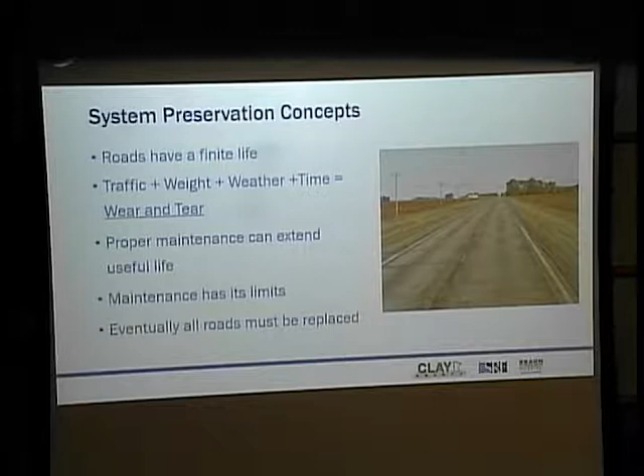Priorities of pavement preservation are really focused on preventing fair condition roadways from falling into the poor condition category, because that's when maintenance activities tend to be a lot more costly. Whereas if you've got a roadway in fair or good condition, you can do a seal coat, a crack seal, or a mill and overlay, which is a lower cost solution, rather than a pavement in poor condition where you're going to have to reconstruct it, which can be a lot more costly.

It's really important to know that, because a lot of times you'll see people doing work on roadways that may look good and are still in fairly good shape, but you're really just trying to extend the life of that roadway at a much lower unit cost, rather than always fixing the poor condition pavements, which is always going to be a more costly solution.

So you want to prioritize preservation strategies like mill and overlays and seal coats over the more expensive reconstructs, and really try to dial in the appropriate life cycle time frame for each of the roadways. Again, there are different traffic conditions and weather and soil conditions on each roadway, so each roadway, depending on where it is, has a unique life cycle.

As part of this pavement management software that the county uses, you're able to dial in for each roadway segment in the county what the appropriate life cycle is for it, and how to use the preservation strategies most effectively for that roadway.

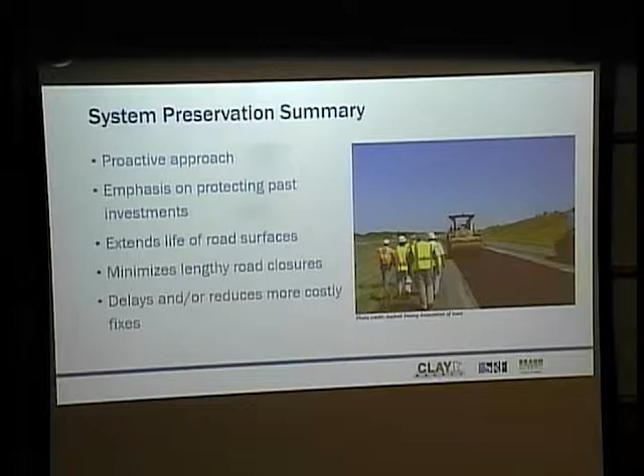Getting into some of the existing tools the county currently uses: they use ICON pavement management software, which takes into account a number of factors. MnDOT collects pavement quality data on a cycle, and that data is imported into the software along with construction project history. It uses GIS and tracks all the roadway segments in the county, so that data can be used to project future scenarios and assess the current state of the system.

The county also really understands the preservation activities and why they're necessary to maintain the system, including the importance of chip sealing and mill and overlay as part of preservation activities rather than just focusing on reconstructions.

So does the state test the roads, or do we test them? The County Engineers Association has a contract with MnDOT to do that for the county, so the state does that for all counties - all 87 counties get data. It used to be every 4 years, now it's going to be every 2 years. We realize this data is very important but it's costly, and as an association, counties have banded together to increase that data collection to every 2 years now.

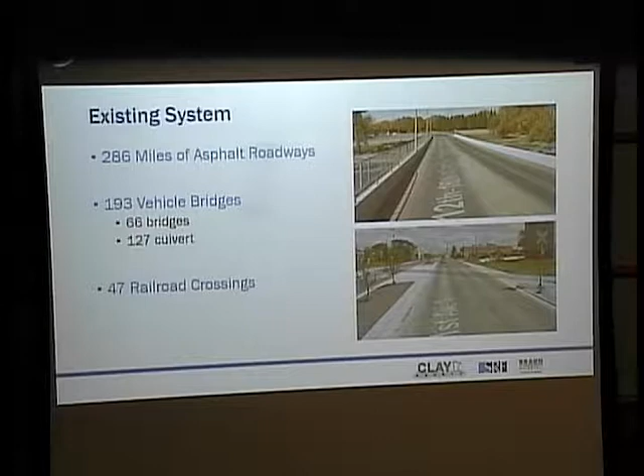Going through some of the existing system characteristics the county has: about 286 miles of asphalt roadway and 193 vehicle bridges, which can either be a culvert or a bridge, on the county system, plus about 47 railroad crossings. All of these assets come out of the county's budget every year to maintain. The ICON software I mentioned is just about pavement management - these other systems we look at as a whole, allocating budget for each item for maintenance, with pavement being its own category.

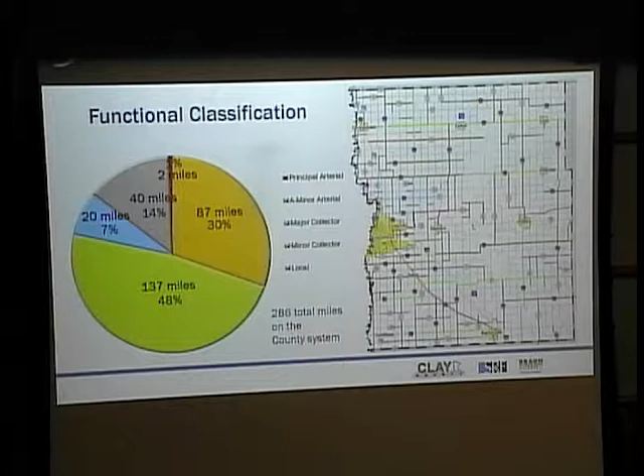As mentioned, there are 286 miles of roadways on the county system. The county's roadways are broken down by functional class. This map and pie chart highlight the breakdown of functional class, from principal arterial down to major and minor collector and local roadway. It's really important to establish a functional class system for your roadways.

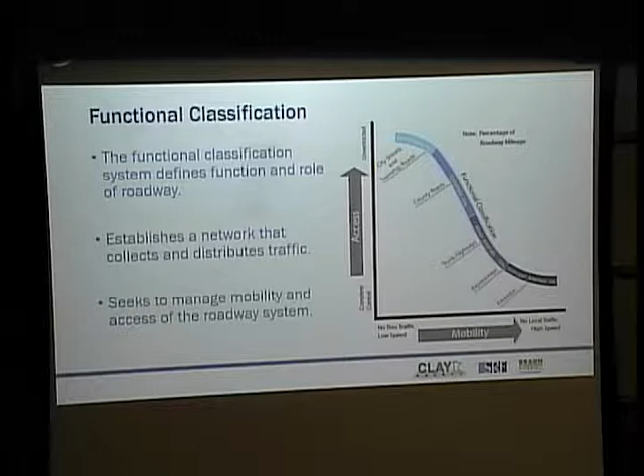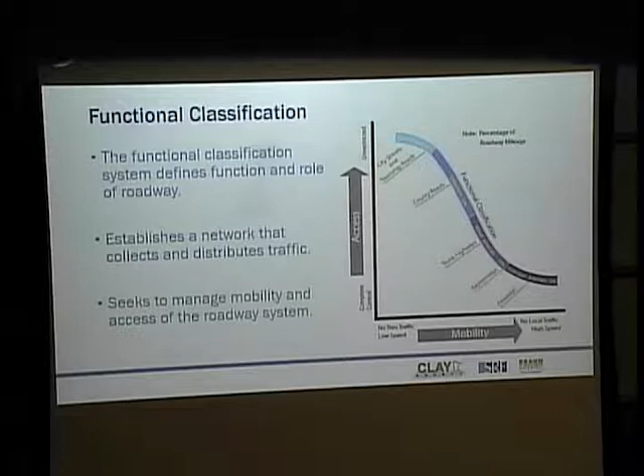It helps define the function and role of the roadway so you can establish a good network that collects and distributes traffic appropriately. The graphic on the right shows that the higher the access on a roadway, typically the lower the mobility. So city local roads tend to have a lot of access points, meaning it's a bit slower to move through them, versus a principal arterial like a freeway or expressway, which is meant for high mobility and moving traffic efficiently and quickly, so there tend to be a lot less access points on it.

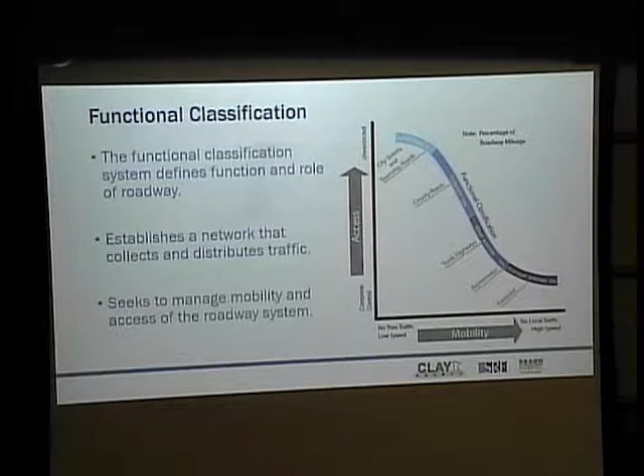All right, so I'm going to kick it over to Amy now to talk a little bit about the pavement.

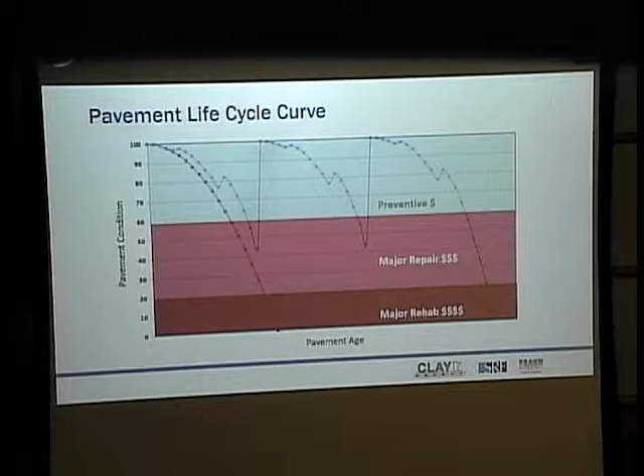Do we work this all into our 5-year plan? Is that all part of it? Right now, a lot of this is how Eric and I are viewing the system, so this is going to take a more scientific approach, but yes, this is 100% going to help us with our 5-year plan. And then we will bring this to the highway committee and show you as well, and hopefully, between our entire highway committee, we will come to a consensus on making the right decision. So that's kind of our plan.

It's a great tool for developing your plan, but it's just a tool - just a software program, so it can't replace engineering judgment. Maybe you have a road that needs increased capacity because it's getting more traffic, so you need to rehab it sooner than what the pavement condition shows. Or maybe there are drainage issues or other things that force you to put it on your CIP list when the condition doesn't necessarily dictate that.

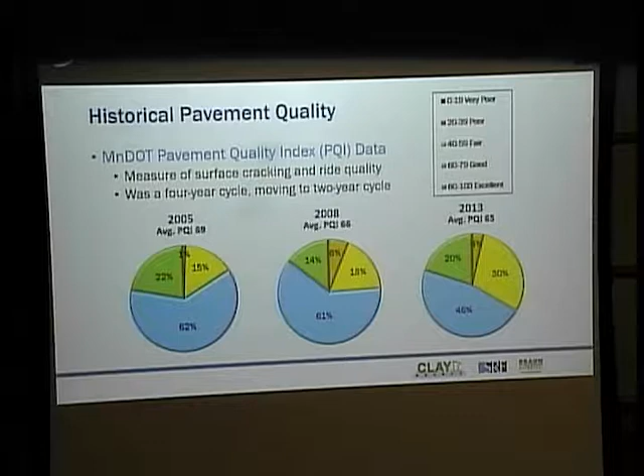So what we did was we used the ICON pavement management program to use that historical data and project where conditions are today based on what history has shown. So you can see here that the average PQI today, we're projecting to be a 58, and we've got quite a bit more pavements in that fair, most critical category.

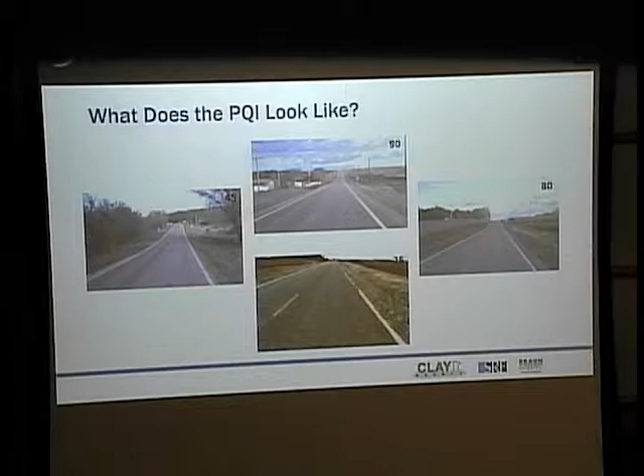All right, so as part of our plan, we developed a sketch tool to kind of analyze and look at the data that the county has to work with.

First was, for ICON, we can use that to project out some future revenue scenarios, but we need to establish what the revenue inputs are to begin with. So the county has various revenue streams they can use for pavement management and asset management, including their bridges and their railroad crossings. It comes from local, state, and federal revenue sources.

So what we did was reviewed past historic revenue streams and applied some inflation factors to establish a baseline amount of revenue that we could then use and project it forward.

So we used a 20-year projection timeline, looking at the years 2018 through 2037. And then we applied inflation factors to the revenue streams of 2% each year to the revenue, and then 3% for the maintenance strategies.

So this is what we used for, we'll discuss a little bit of the budget projection scenarios in a second. So just as the breakdown...

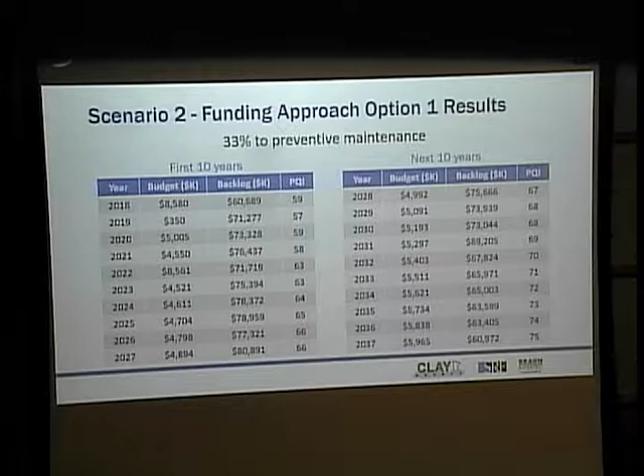We are projected to be at a PQI of 75, and the backlog goes down to right around 60 million with that one. No additional funding is put into this, it's just reallocating the money we have in a different way. The last one ended at 68, so you get almost a 10-point jump in pavement quality just by spending money differently. That shows the value of spending money on your good pavements to keep them in good condition.

Okay, so the next two scenarios we looked at, if the county were to increase that wheelage tax option they have. Currently residents are charged a $10 per vehicle tax, and counties have the option to increase that all the way up to $20. That's new as of this year. I think it recently changed from 10 to now you can go upwards of 20, or somewhere in between.